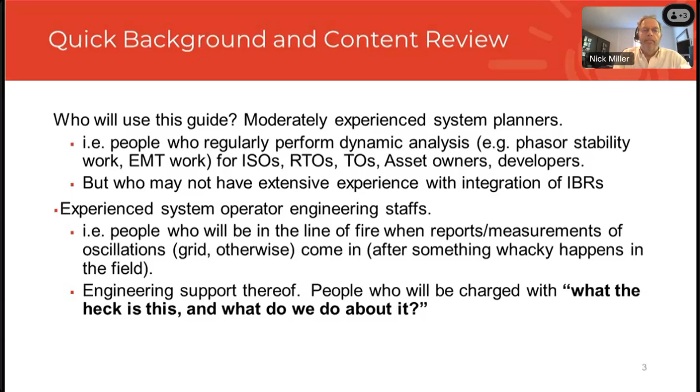As is always necessary, we're addressing a spectrum of users, and as always, an executive summary is a good thing. I used this slide last time we spoke—somebody will remember it. There's a short executive summary, a few pages, that sets the stage for what's in the guide, and that is, if you observe oscillations in the system, there are a couple of short likely causes.

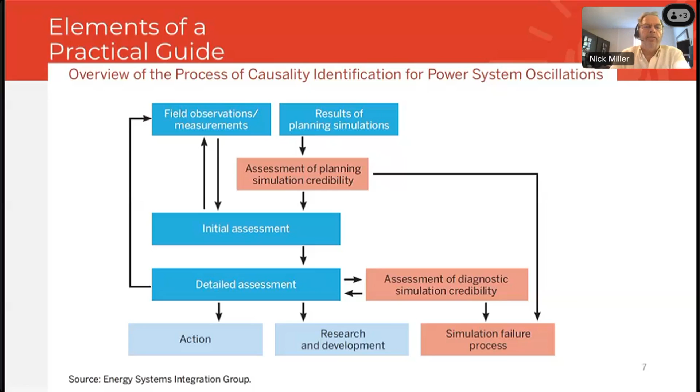Now, this is maybe a little tough to stomach. As I said repeatedly, oscillations are one manifestation of poor stability. The industry and many practitioners on this call understand that stability is a broad topic, of which oscillations are a subset.

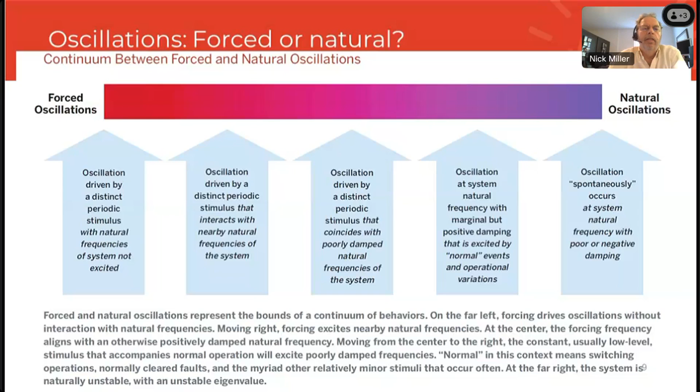So that returns. The next major discussion, and it goes on for many pages, and I'll talk a little bit about it, are all the different analytical tools that can be brought to bear for not only diagnosis of causality, but design and mitigation.

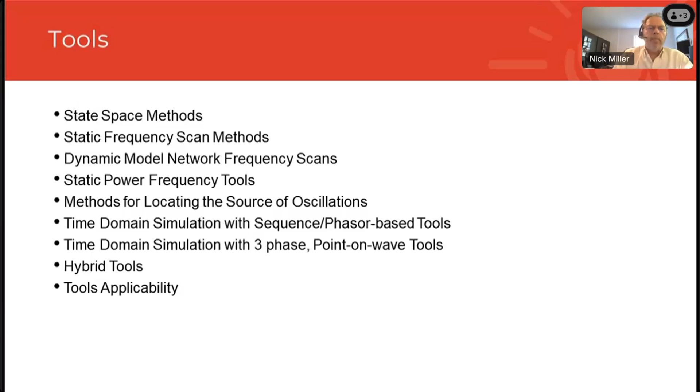So the next couple slides are just maybe a few things I pulled out of the document. I don't need to spend a lot of time on them. There's figures and some discussion of when and where these tools can be useful.

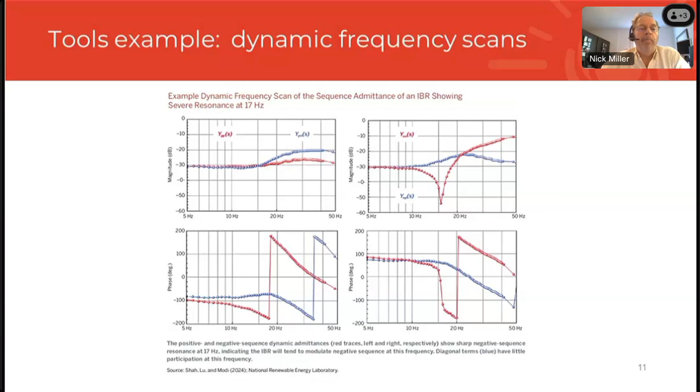There's a fair amount of discussion about ways to slice and dice and extract useful information from field measurements. So you get some oscillography, things like FFT, what makes a good FFT, how you can present that.

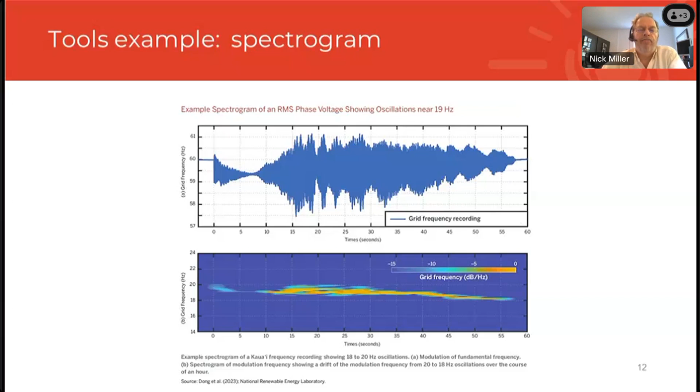These could be really useful for trying to understand sensitivities and to ferret out what's really going on from field measurements. This is a different example.

There's a really nice example in the document from CAISO where this system sensed a system oscillation on COI and was able to point to bad actors in Southern California. So these tools are very useful for finding the bad actor.

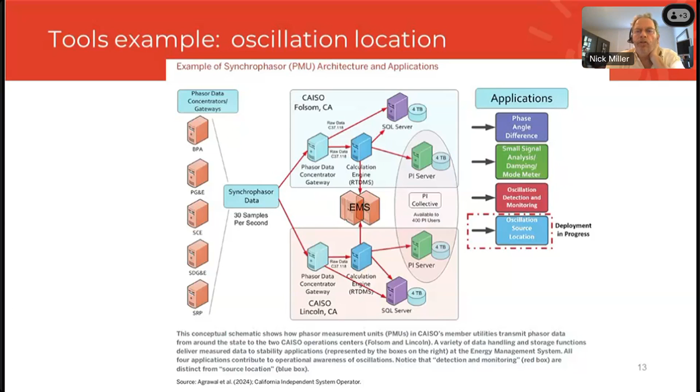Bad actors are especially of concern when you're on the left end of that forced to natural frequency spectrum. So there's some discussion of those. A few experts made contributions to the document.

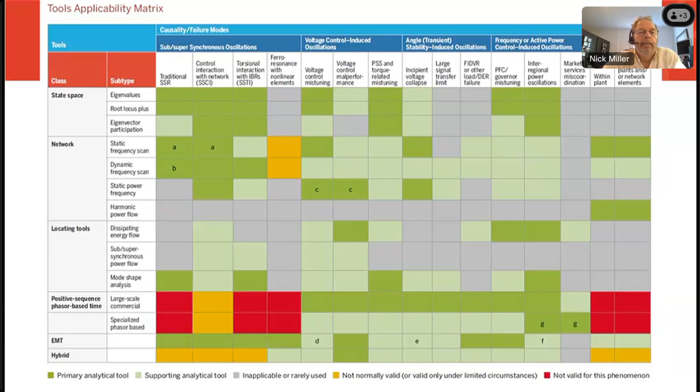As is always the case with these kinds of things, there will be people that don't quite agree with the grading. I'm interested to hear from you, and there's a fair amount of discussion in the document to try to capture some of the nuances that can't be caught in a chart like that.

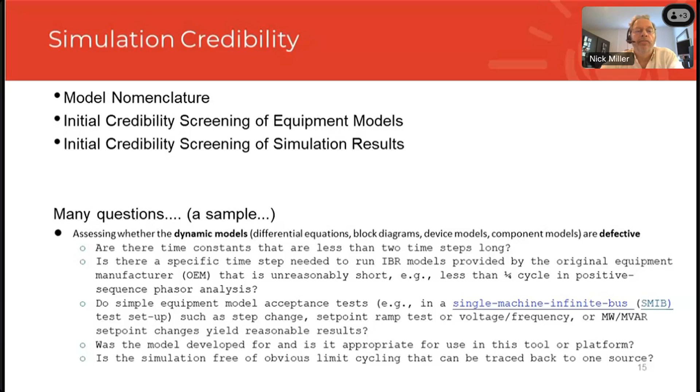So then going into that box on, do you trust your simulation? These three bullets here are a subset from the table of contents on what's in the simulation credibility section. There's a bunch of questions and other kinds of things designed to help the user sanity check their work - is this an artifact? There are lots of different kinds of artifacts in the list. I'm not going to read the questions here, but they go on for several pages of ways. And if you flunk these tests, there's a much deeper discussion of what to do about it towards the end of the document, called simulation failures.

There's a lot of practical advice in there - inputs from people that have made their livings doing simulations, and bits of advice like don't make this mistake, don't do this, avoid doing this, make sure you do this - that you won't find, frankly, in more scholarly works.

So again, emphasis on practical. Then we get into this initial screening that I told you about - we introduced this chart before. This is obviously a killer eye chart, and it will get lots of people excited. Some people are going to love this, some people are going to hate it, but this is the reality.

Again, like medical diagnostics, you get a whole bunch of symptoms, and the left column is answers to questions that have been posed for the user, looking at the oscillations that they see. Are they sawtooths? How fast are they? Are they damped? What's involved? What's the participation?

And lots of dark green in the columns, which are the different diseases, will point you in a direction of saying this is likely. Again, if you observe something and it's red, it's not that phenomena - so those are mutually exclusive. And some of them are not meaningful.

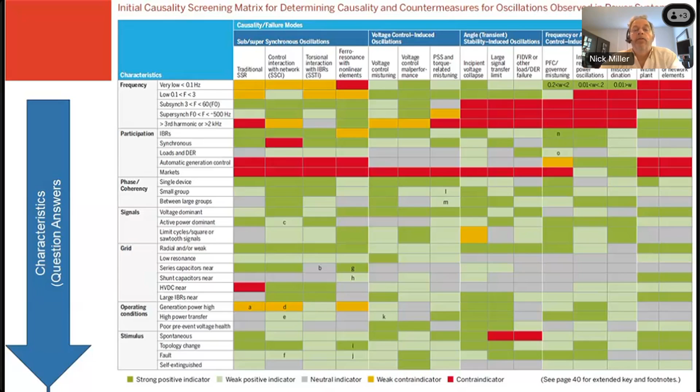So this is a lot. Whenever you make a condensation like this, you throw away a lot of nuance, but this is a nice tool - and some people have been very enthused about it - for trying to point you in the right direction.

The idea coming out of this is that you go into this detailed assessment here, and you come in with, okay, I've seen a whole bunch of different things that make me think this is subsynchronous torsional interaction. Do I have enough information? Can I extract the information I need from the signals I've got?

Can I do signal processing? Do I have the right FFTs? Or do I need to go back and get more field measurements? Or do I move on to start setting up simulations to do causality? And there's lots of tests lined up that are aligned with the different kinds of diseases - run these kinds of tests, look for these kinds of things.

And then some questions: do you really believe? Have you determined with a reasonable amount of confidence that this really is the cause of the oscillations? And then this next point is rather important, and several of my contributors made a big deal out of this.

It's like, once you've figured out that there's an oscillation out there, do I really need to do anything about it? There's a certain degree of triage in a real power system, in a practical power system - 'nah, this oscillation is not worth pursuing' is a perfectly legitimate conclusion.

Now, there's a lot of discussion back and forth. Nick's view of the world is that you have to be reasonably confident that you understand what's causing an oscillation, even a seemingly minor one, before you decide to ignore it. That's why it resides here rather than upstream. Now, some kinds of things maybe you can dismiss right up front, but you've got to be very careful.

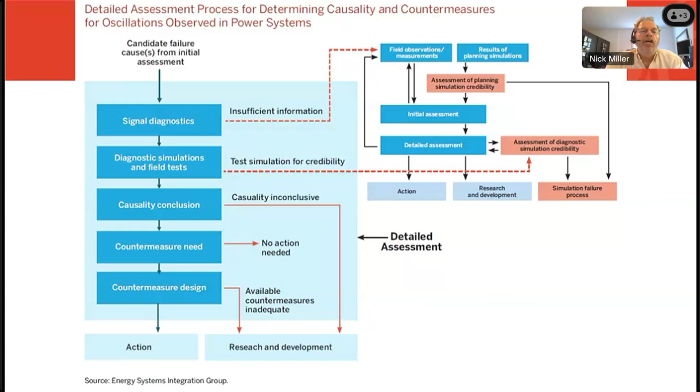Then we go into countermeasure design. There's a fair amount of discussion of different kinds. So this is the overall flow - each of the discussions within the detailed process kind of follows that. Now, there's a couple of deep dives.

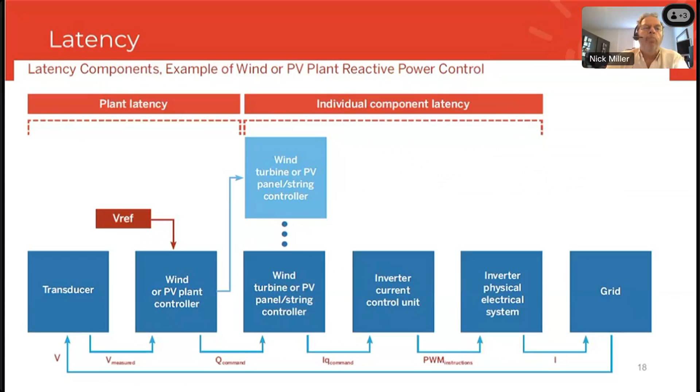I won't spend much time on this, but there's a latency issue—communication latency cuts across causality in several places. There's a lengthy discussion about the constituents of latency and how they can bite you and what you might be able to do about it. I'm going to give one sample from each of the 5 sections quickly, because I'm running out of time, and it doesn't make sense to dive in deeper.

Under the subsynchronous and supersynchronous oscillation category, there are 5 flavors. There's these kind of cool drawings—I thought they were cool, not everybody likes them—that are designed to point out, okay, for SSTI, we are specifically talking about interaction between the inverters and the torsional reality of synchronous generation.

There's a whole section on language because the language of subsynchronous behavior is not completely uniform. There's 14 flavors of subsynchronous stuff in the CIGRE taxonomy, and a different number in the IEEE taxonomy. I tried where we could to avoid using acronyms because we don't have perfect consistency. So these drawings are meant to say, this is the interaction we're talking about.

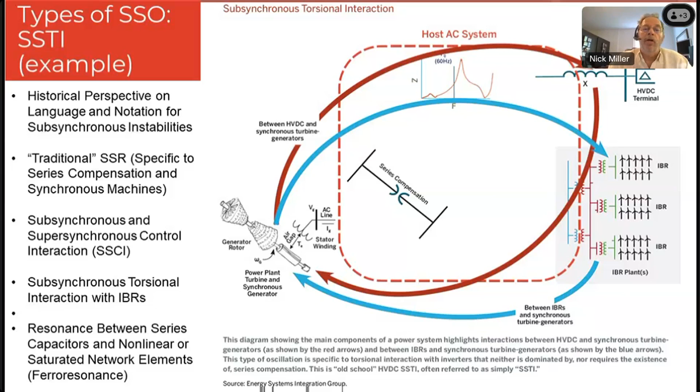This is, for example, the red is old school HVDC subsynchronous torsional action between a single big IBR. The blue are different flavors between modern IBRs and maybe a multiplicity of them. So there's lengthy discussion about what they look like, what to look for.

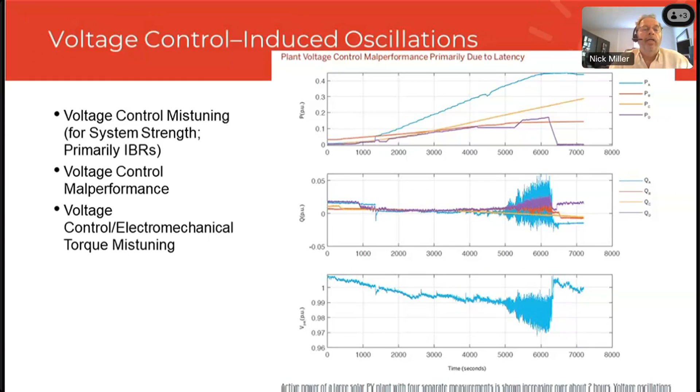The next major family is voltage control induced oscillations. There's 3 subsets on the left that are in the discussion, different kinds of malbehavior. This cool example is courtesy of Ling Ling Fan—a cool system that is stable until it gets too stressed, and then the voltage control goes unstable, driven by, primarily aggravated by, communication latency. So it's kind of a cool example.

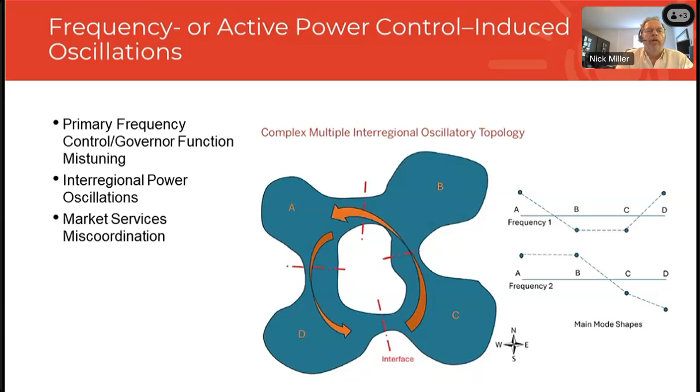These things are pretty well analyzed, for example, by phasor analysis. But the modeling can be quite tricky because it can spill into regimes where the bandwidth of the plant models is inadequate. There's a whole discussion on harmonics that are somewhat separate—you could argue they shouldn't be here, but harmonics manifest themselves as oscillations. And in this world of very fast inverters, high frequency pulse width modulation, the line between traditional harmonics and very fast control interactions is quite a bit blurrier than it might have been in the past.

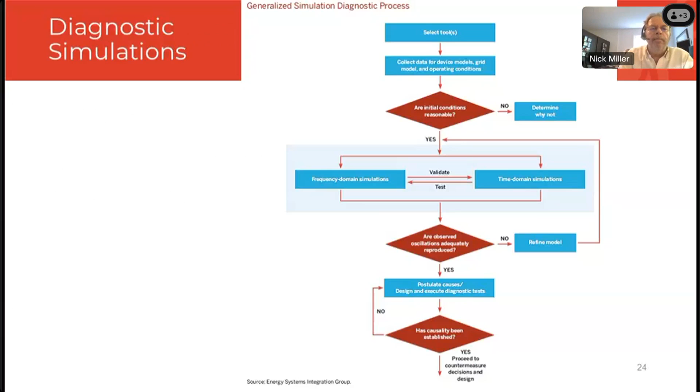There's some guidance on how to set up simulation diagnostics. There's a flow chart here with a bunch of help for the thing. Then I talked again back into the simulation credibility. We now get into failures.

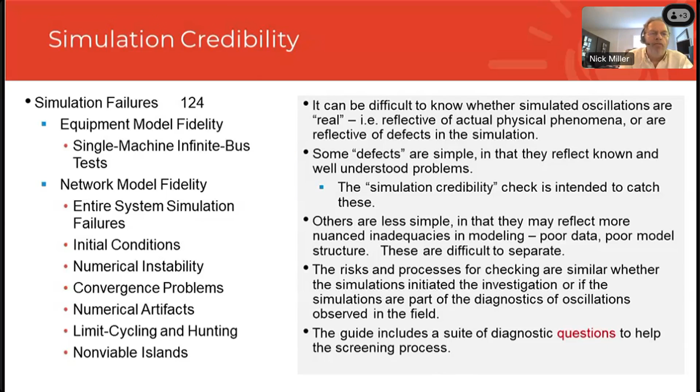I won't go through it, but the list on the left is again taken from the table of contents—different modes of ways to check that your simulation is credible. There's a whole long talk about single machine infinite bus tests, things that work, things that don't, ways to avoid numerical instabilities and other kinds of artifacts that may present themselves as oscillations but are bogus.

Okay, and then we get to the end here. So there's a closure. We put quite a bit of effort into the references. The references go on for several pages, but they aren't thousands of references. We could easily have had thousands, since this is a very rich topic.

We tried to segregate the references by the general pathologies, and tried to get the best ones. I'd be interested to get some feedback—people coming back and saying, oh Nick, you missed this reference, which is a gold mine. Those kinds of feedback are most welcome. As I said, this is the first cut. I'm pretty excited about it.

I think that the industry, that it's filling a gap that the industry needed help with, and it'll be interesting to see how it's received. If it's successful, then people are going to have a whole lot to say about it - you missed this, I don't believe what you said here, you should have asked this question as well. Those kinds of feedback are most welcome, and hopefully this thing will be just Rev 1.

There's a glossary with the usual acronyms, except that I added an annotated column. Those are Nick's view of what these things really mean. You might enjoy it, you might hate me for it.

And then finally, we're wrestling a little bit right now. My vision, as I keep saying, is for people to have hard copy with coffee stains on it, but we're not exactly sure how we're going to get hard copy into the hands of users. The simplest thing is for you to download it and print it on your company printer, but it's 144 pages and it's got high quality graphics in it. You don't want to print it on your inkjet because you're going to lose quality. It wants to be printed on good paper with a good printer.